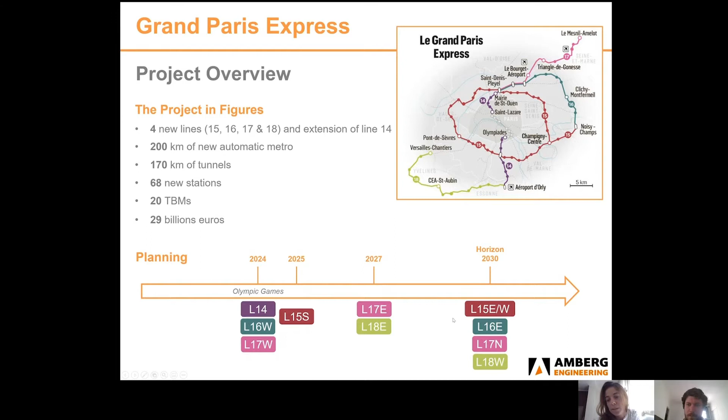At the beginning, the project was planned for the Olympic Games in 2024, but some problems with the planning and the logistics forced a delay of some of the lines. For the Olympic Games, we will see already achieved the line 14, the western part of line 16 and 17. In 2025, we will see line 15 South, and line 17 East and 18 East will be ready in 2027, and the rest of the lines are expected for 2030.

Amberg Engineering collaborates in different projects of the Grand Paris Express. The first project was line 17, where we have already done the preliminary design and the design. We are now going to write the documents for the tender. After this, once the project is attributed to the constructor, we will be there for the supervision of the project. During 2019 and 2020, we did the tender design for lot 3 of line 16.

The answer for the tenders came up at the beginning of the year, and it was another joint venture that was chosen to do the construction.

We are currently working on the tender design of line 15 West. We are one of the 4 joint venture candidates, and we started this in October, expecting to deliver all documents by the end of this year. We will start soon with the same joint venture on line 15 East, with the second lot of line 15 East.

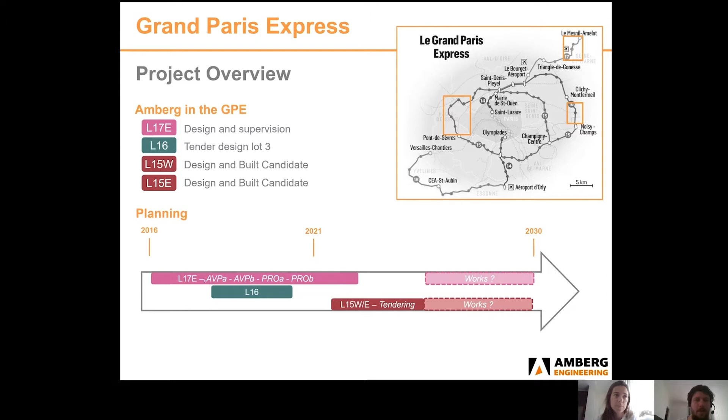Starting with line 17, as with all the projects of the Grand Paris, the owner is the Société du Grand Paris. They are all located in Ile-de-France. This line 17 is in the north part of Paris.

The first is lot 1, the southern stretch of the project, which is already under construction. We also have lot 2, the central stretch of the line, which includes the 7 kilometers of viaduct. And lot 3, where we are working, is about 6.5 kilometers of bored tunnel, 2 new stations, Charles de Gaulle 2 at the airport, and Le Mesnil-Amelot.

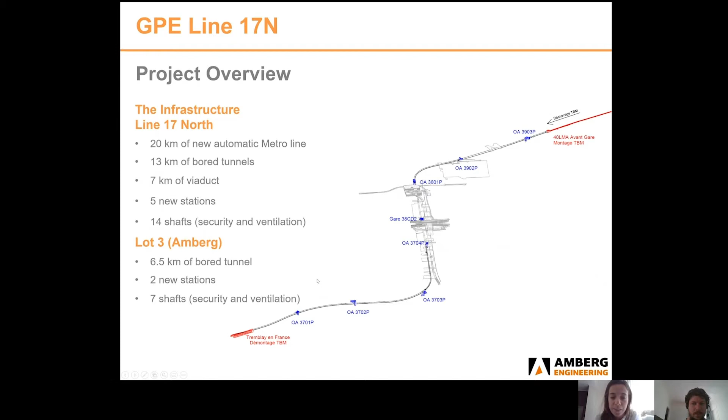The project is about 6.5 km of tunnel, covering many geologies. The main geologies we found are sands, marls, and limestone. We are doing the entire profile under the groundwater table.

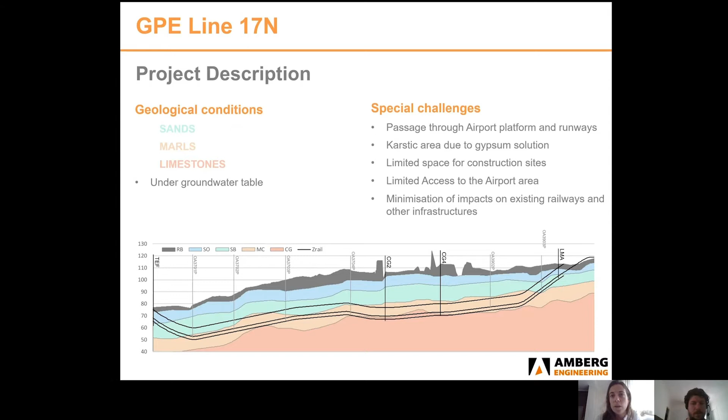The special challenges in this project are the passage under the airport platform and runways, karstic network areas due to gypsum dissolution, limited space for construction sites since some sites are within the airport, limited access to the airport, and the need to minimize impacts on existing railways and other airport infrastructure.

We are talking about a bored tunnel of about 9.8 meters in diameter. The profile has a maximum overburden of 33 meters, and a minimum of 3 meters, which is very low for the launching and retrieval shaft of the TBM, and we are planning measures to compensate for this low overburden.

The station Charles de Gaulle 2 will be built before the passage of the TBM. The shaft 3801, the future station of Charles de Gaulle 4, will be excavated after the passage of the TBM.

We have this limited covering for the TBM at the launching and retrieval shaft, and also one of the special points of this project is the coordination with Aéroport de Paris and SNCF.

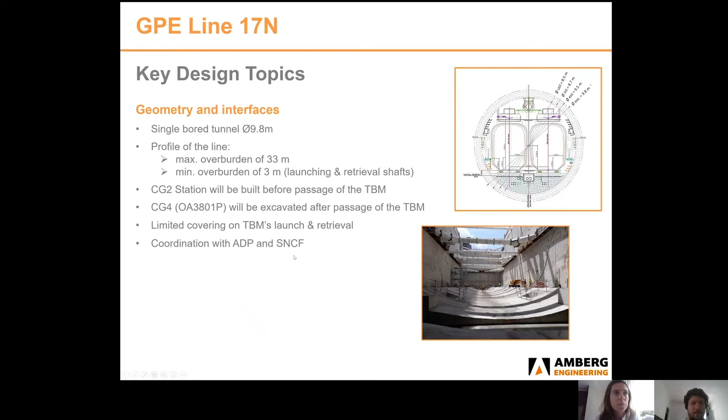Some critical design issues in the project.

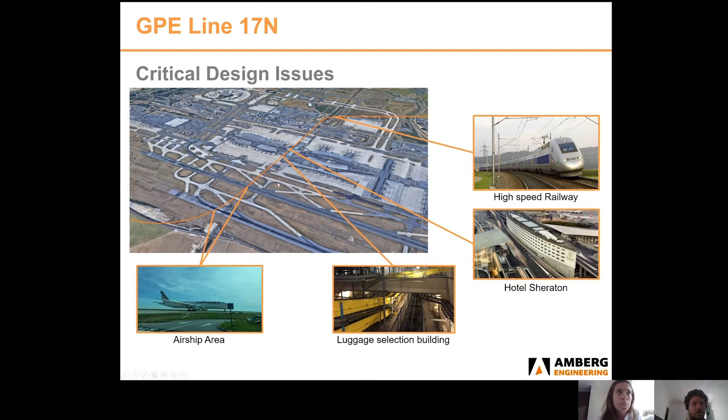Our scope in the project is the tunnel design, and also the finite element methods for the settlement calculation. We are also doing the risk analysis and definition of mitigation measures. We are thinking about how we can do the monitoring, to monitor all the deformations in the ground and also in the buildings. And now we are starting to write the tender documents.

The Line 17 project is the first project in France where a TBM crosses airport facilities. The good communication between airport authorities, the Aéroport de Paris, and the Amberg team enables very good collaboration and positive progress in adapting the project to the requirements in terms of admitted deformations, monitoring system, mitigation measures, etc.

And the high quality that we are bringing to this project is that we are an integrated team in Paris, which allows for optimal communication on all the transversal issues in the project. And that's it for Line 17.

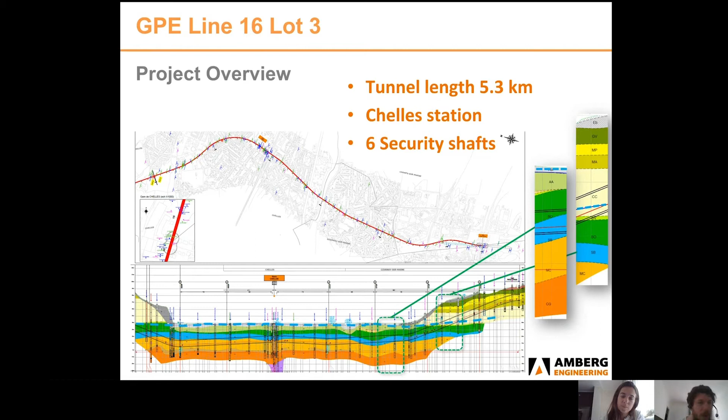I will now present three particular aspects that were done by Amberg on this tender, which were a plus from our side. We did the hydraulic seepage analysis of the different shafts. We did a 3D visualization of the construction method for the cross passage. And we did all the surface settlement analysis, especially a 3D model of the Sevran shaft.

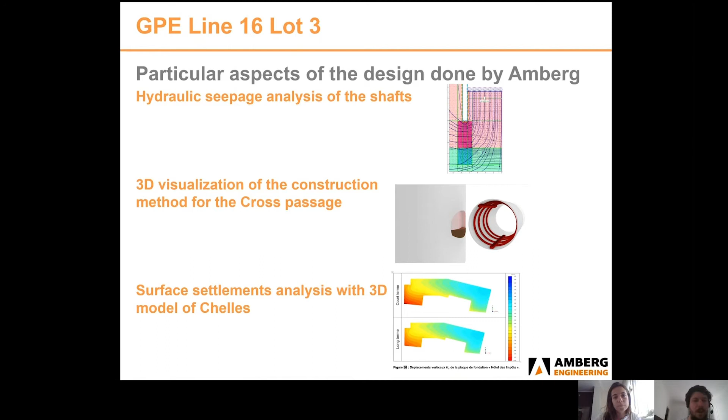For the seepage analysis, we are able, with the finite element method, to calculate the water flow, to estimate the amount of water that should be pumped, and we use the same model to analyze the stability of the shaft. Usually on those projects, especially in the tender phases, we don't modelize the pumping wells in detail, but here, as the shaft was entirely under the water table, we did a more accurate analysis.

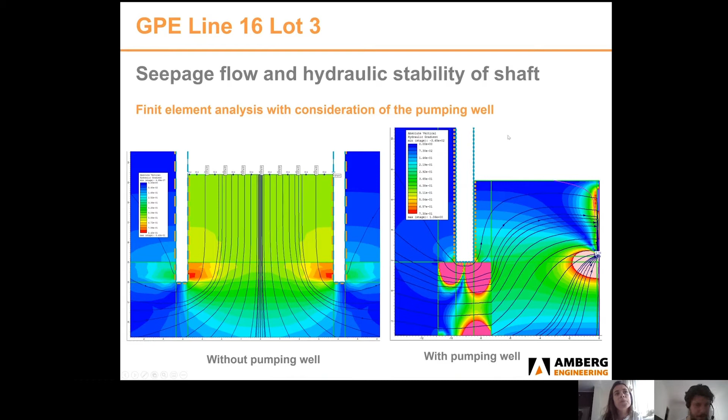For the 3D visualization of the cross passage, we wanted to have a really graphical view of the different phases of the opening of the tunnel lining. So we did a 3D modelization with all the steps of the construction to help the constructor communicate their method to the client.

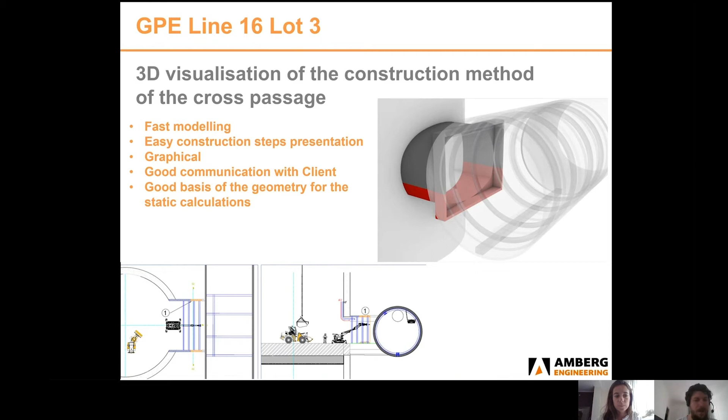You can see here the 3D model we used for the settlement around the Chelles shaft. It was a complex model because we had some buildings just next to the station, and we were above some piles, so deep foundations. We had the SNCF train station of Chelles, and we were just next to the station, which the tunnel was going under. With the station you have all the railway, and we needed to be really accurate on the settlements.

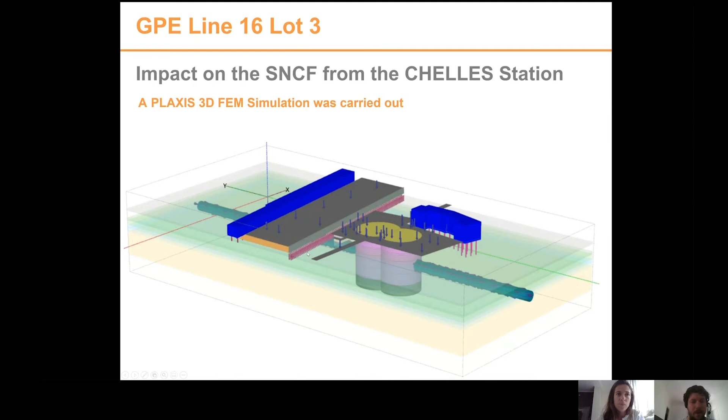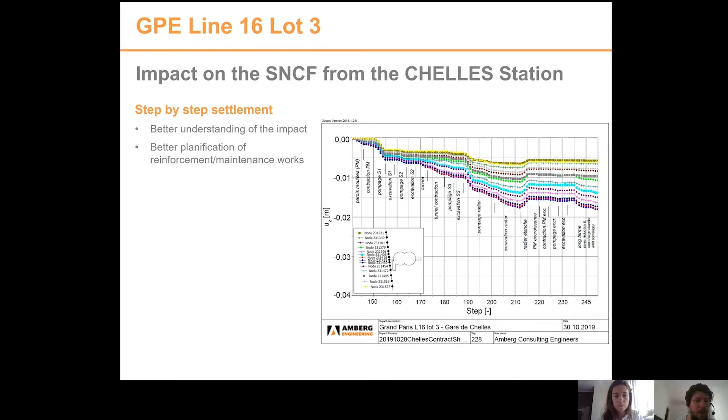What we can give as a result is a settlement value for every step of the construction. This helps the constructor know where it should organize some maintenance or some reinforcement work.

What was the scope of this project? We did the geotechnical analysis, the tunnel design, and the finite element modelization for the settlement calculation, with the 3D finite element model of the station as I said before. We did the risk analysis and the definition of the mitigation measures. We did the monitoring concept with the knowledge of our other part of Amberg, which is Amberg Technologies, and we helped the constructor, our client, to do the tender document.

This project, as I said before, was especially difficult because of the impact on the Chelles station on the SNCF railway, which has a really low tolerance to settlement. That's why we did a 3D analysis even in the tender phases and not later.

Working on metro projects has been incredible to me because I'm learning a lot about really interesting topics. But what I like the most is that my work will help construct a metro line that will be widely used every day.

And for me, that's amazing, especially in an incredible city as Paris. After 6 months working at Amberg, I asked to go abroad from Switzerland, and they sent me to Paris, where I am now, working with really skilled teams. We are working with the constructor, the architect, and other engineers, all in the same building, in the same place, to work on one of the biggest metro projects of the moment, the Grand Paris Express. I'm learning new skills every day, and I'm really happy to be part of this huge project.

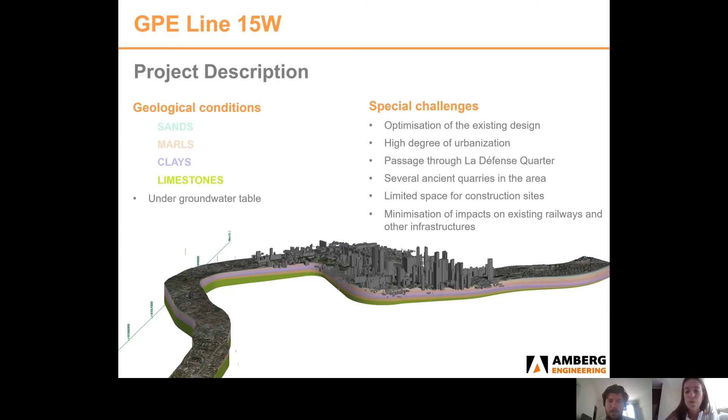The project will be done with 2 or 3 TBMs. The tunnel is a single bore tunnel with an excavated diameter of 9.86 meters. We have an overburden between 10 and 40 meters along the tunnel, and some stations will be built before the passage of the TBM and some after.

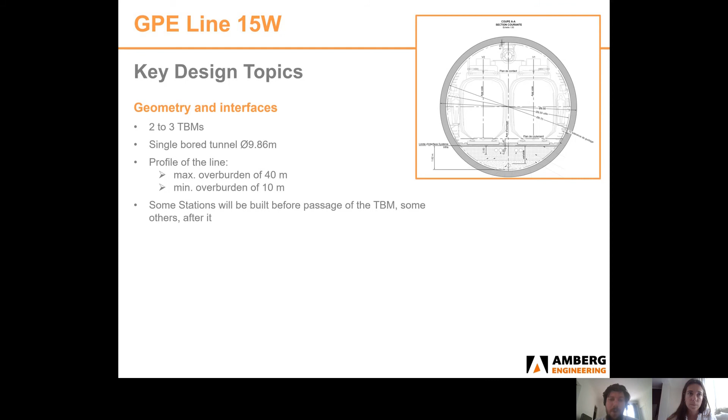As I was saying before, we have a high degree of urbanization in the area. We can see here the La Défense quarter, where we are going to cross it. It's required here to pay a lot of attention to the management of the front pressure of the TBM.

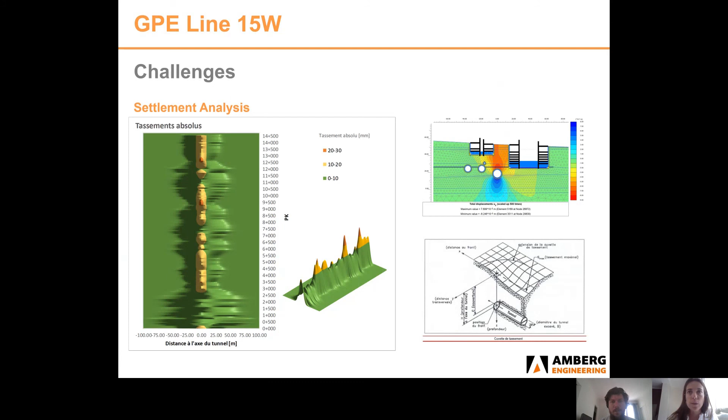We have done a first analysis of the settlements. Once this analysis is done, we selected the most sensitive buildings or infrastructures along the alignment of the tunnel, and we have done a finite element analysis to be sure that we are not going to exceed the limits for the deformations of each infrastructure.

The scope of Amberg in this project was tunnel and cross passage design, the finite element settlement calculation, the 3D modelization of the geology, the risk analysis and the definition of mitigation measures, and helping the client to write the tender documents.

Line 15 West is a design and build project, and the Amberg team provides wide know-how to the project, where the main goal is to prepare the best tender in terms of cost, planning, risk management, construction methods, admissible deformation, monitoring system, mitigation measures, etc.

To ensure good team working, we are all working at HQ in Paris, together with the constructor, the designer, and sometimes the architect, so with all the different stakeholders of this tender.

And that concludes our presentation of the Grand Paris Express. Thank you very much. Thank you.

Hello everybody, I'm Miguel Moreno, project engineer from Amberg in France. I'm so happy to have joined Amberg, a company specialized in underground projects all over the world. I've been interested in this kind of projects since I studied civil engineering in Colombia, a country full of mountains whose future is in underground works. I also like different cultures and languages, and my time at Amberg has allowed me to be part of a dynamic, multicultural and international team, all working on a big tunneling project in France, as I always wanted.